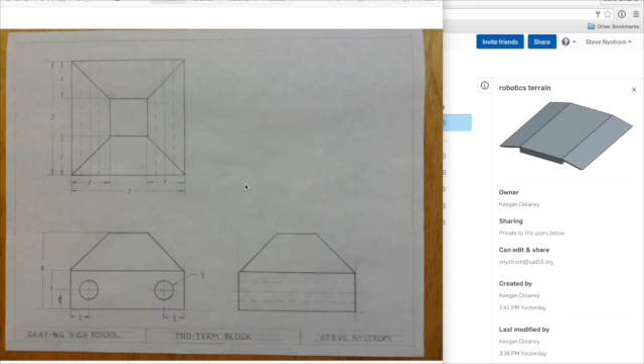Okay, so this is your final exam. Let's assume that you've now come up with a design, and you've got it all sketched out. This is one version, and this is a different version that I made before I got done with the second version.

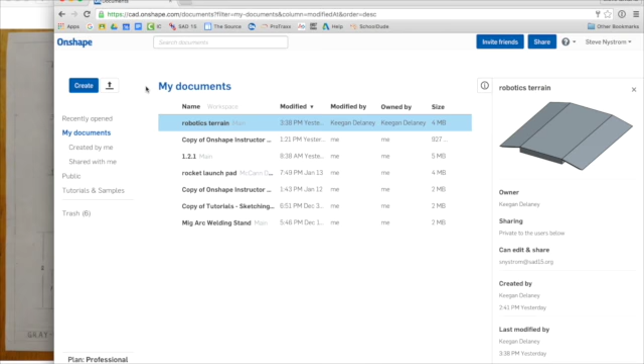These were my little sketches I was doing on the side so I knew I was heading the right direction. I'm doing this on my desktop, so it's a slightly different view. We're going to create a document called Midterm, preceded by our initials, because we're going to share it with Mr. Nystrom, and he needs to distinguish one from the other. We'll make it public so everybody can see it, and it also doesn't count towards some limit that Onshape has for you.

So here we are. My suggestion when trying to make something in 3 dimensions is: how are you going to make this when you actually get out in the shop? With that in mind, let's construct it in the 3D experience the same way we plan on constructing it in real life. So in real life, I would start with a solid cube that's 3 by 3 by 2 tall.

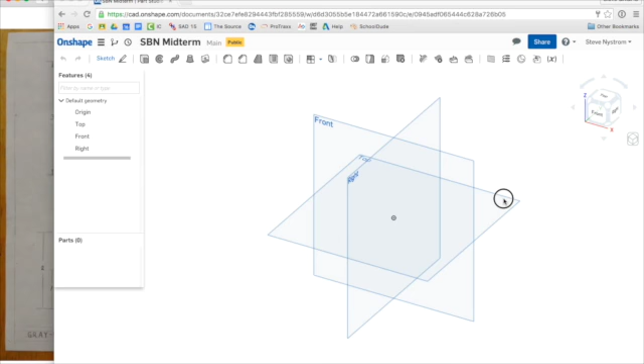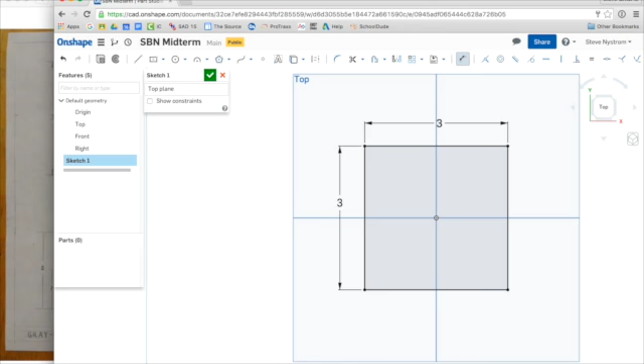I'm going to come over here to the top plane, start a sketch, orient myself to the top, and make a square. I'll use a center point rectangle because it makes everything centered. I'm going to dimension that to 3 inches and 3 inches. And that's it, finished with that sketch. Check, good to go.

If I come back over here and see if we can get to an ISO view, get to my ISO here. That's pretty much it. So now I'm going to go extrude it.

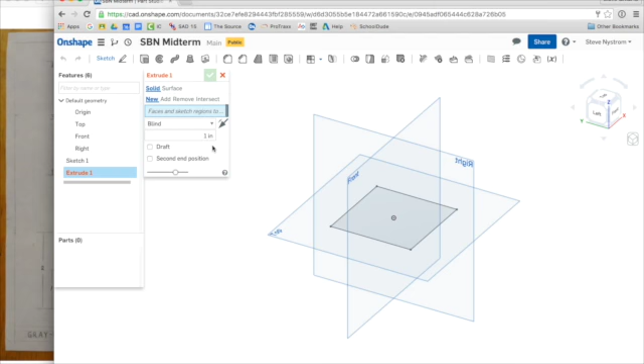It's going to ask what do you want to extrude. I want this surface to be extruded. Up is the fine direction. I want to go an entire 2 inches. Enter, check. So I now have one sketch that's a block, extruded 2 inches, and this is now what I have.

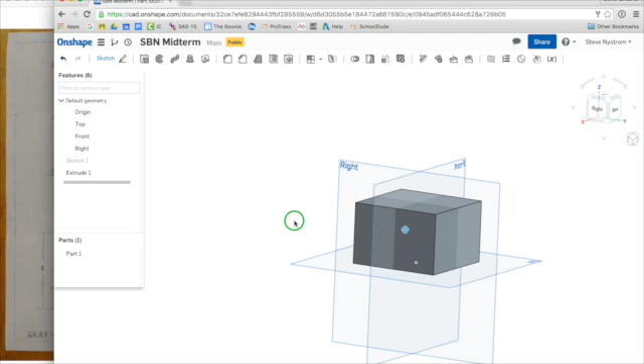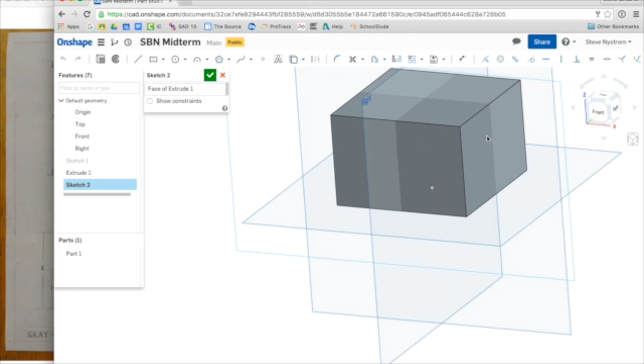Okay, put that back so we've got right in front. It really doesn't matter what I pick next, but I need to cut these edges off here, and maybe while I'm at it, I can cut those holes too. You can do it separately or together. So I'm going to pick this face, make a sketch, orient myself to that sketch.

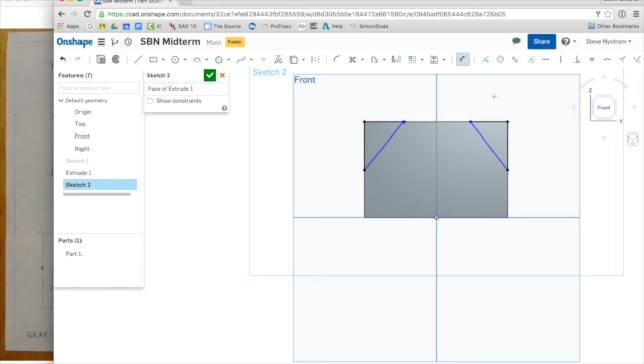I'll make a line that goes from the midpoint here, somewhere up to here, and make that whole triangle there. Likewise, one here, coming down to the midpoint there, and it's midpoint because it's 1 inch. Then we'll dimension these things. This happens to be 1 inch, this happens to be 1 inch. I typically would dimension this, but it's already set to 1 inch, and hence it's gray because it's tagged here at the midpoint.

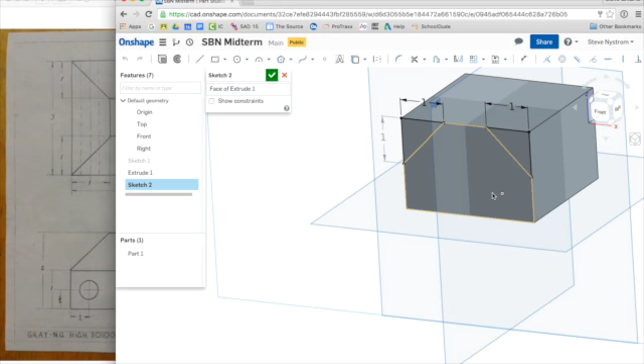Then I'm going to make 2 circles. Since these are going to get chopped all the way through to the other side, and the holes are going to go all the way through too, I can just make the holes here. So, grab a hole tool, make a hole there, make a hole over here, and quickly throw in some dimensions. We want this to be a half inch from this edge.

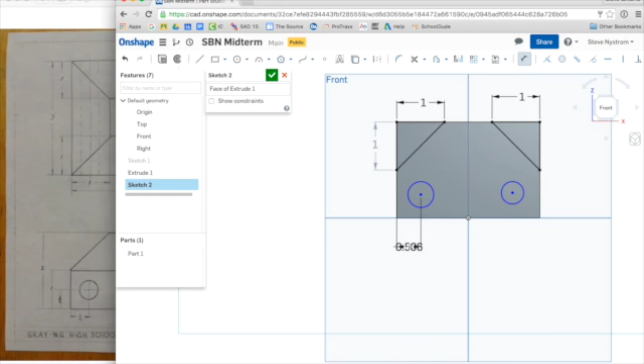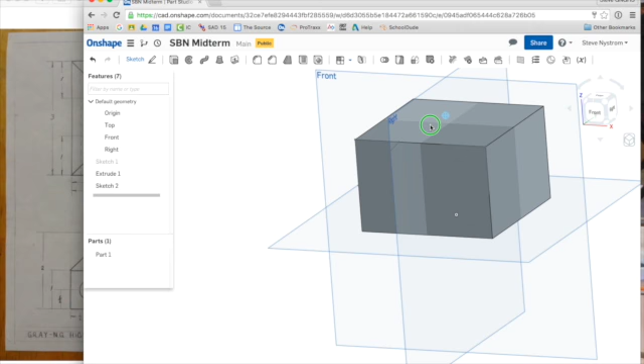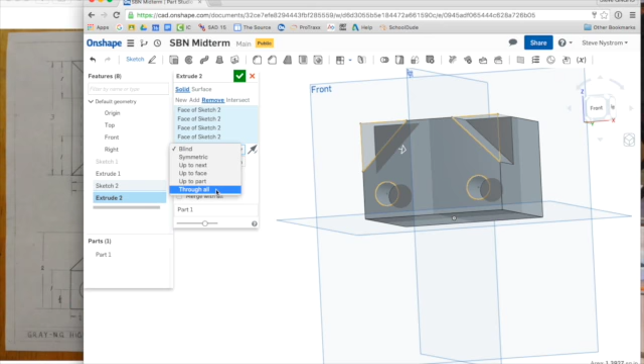All right, everything's black, which means it's fully dimensioned. Check out of that sketch. So we have this going on here, and we're now going to make an extrusion, removing material. The stuff we want to remove — this, that hole, that hole. We don't want to go in an inch, we want to go through the whole thing, so we're going to check through everything.

And there you go, there's the first extrusion. I'm now going to come over to this side, make a sketch, and view normal to that sketch. I'm going to make those triangles again, coming down to here from here. It's hard to grab, like there's nothing seemingly to grab here, so before I do this I'm going to use this little tool here.

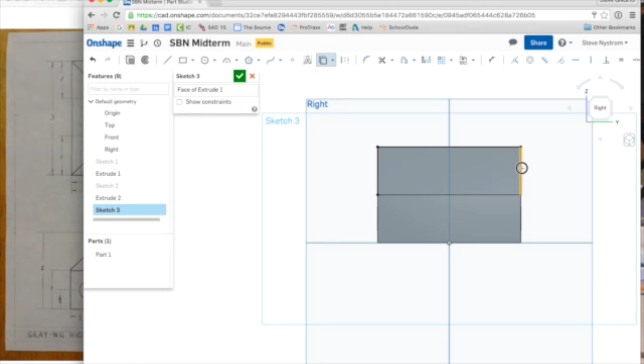It says, hey, bring this edge and this edge into the plane that I'm actually working on. So now this is in my sketch, as opposed to being back here at some distant spot. That being done, I can now make a line from here up to there, and a line from here up to there, and then dimension this as an inch.

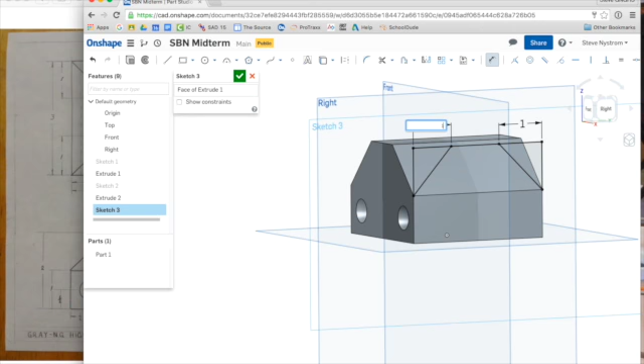I'll say it again, I usually like to be normal to the plane so I can see it, but I think this might be a better visual for you guys. So there you go, I'm done with that sketch. Check, make an extrusion, remove material. What do I want to remove? I want to remove this and that, and I want to go through everything — instead of being blind, we want to go through all.

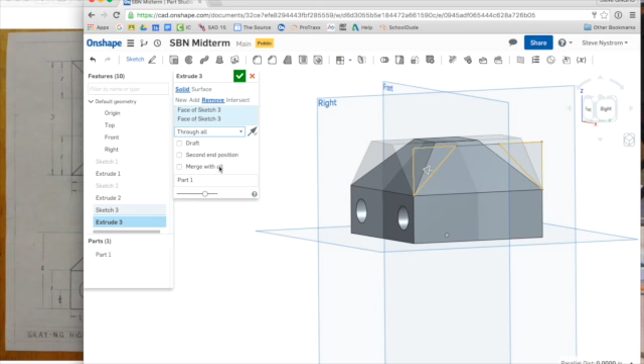Check. And just for kicks and grins, we'll turn off the planes and make it look a little bit nicer. As a final step, we'll go down here to parts, go to edit appearances, and pick some other color, just because we can. There we go, okay, so there's my block. That's what I was asked for.

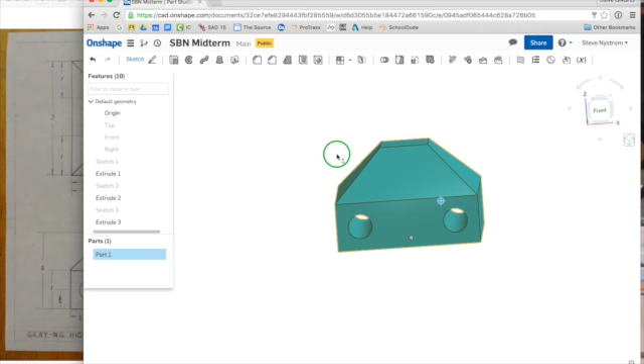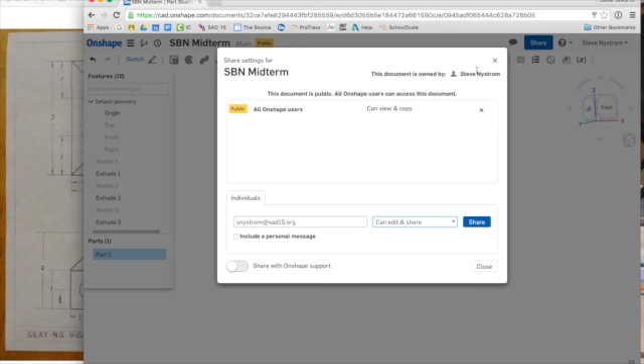At this point, we're going to share it with Mr. Nystrom. Right up here is a share button. I don't know exactly how this will work, but it should be to snystrom at sad15.org. It doesn't really matter to me which permission you give me — I'm certainly not going to be the owner, but you can let me edit and share, or really I'm just going to look at it, so viewing is fine. And then share. I'm not going to do that because it's already me. Okay, there you go.